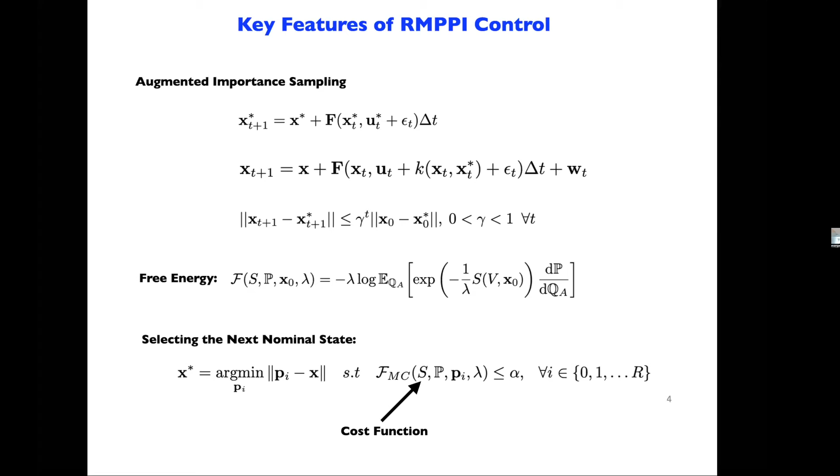And so one of the issues with robust MPPI is that you have to have a cost function, which is okay. You can do the minimization and you can pick the next best nominal state for the nominal part of RMPPI. But there are some blockers here when it comes down to whether or not this cost function is a non-stationary cost function, right?

And so the nice thing with RMPPI is that you can characterize its performance, and you can bring the different components inside that inequality, which tells you that your look-ahead performance prediction, the free energy of how well you're going to do, depends on the capabilities of the low-level feedback controller, a constraint violation term, and a Monte Carlo error.

And so a lot of what we are looking at right now is how we can get more useful bounds than the one that we have derived so far, for example, how we can incorporate in these types of bounds the cases where you have generalization bounds for model learning, and you want to be able to incorporate the generalization bounds into this type of inequalities that you get inside the RMPPI architecture. Some other things that we are looking at right now is multimodality.

And so, of course, we have applied that. We have done testing on real hardware, and this is our testing facility that we have at Georgia Tech, and that's the AutoRally vehicle. That's in the case where things are fully observable. We don't really provide to the vehicle any desired trajectory. We just let the vehicle have a desired speed, go as fast as you can, and you do not hit

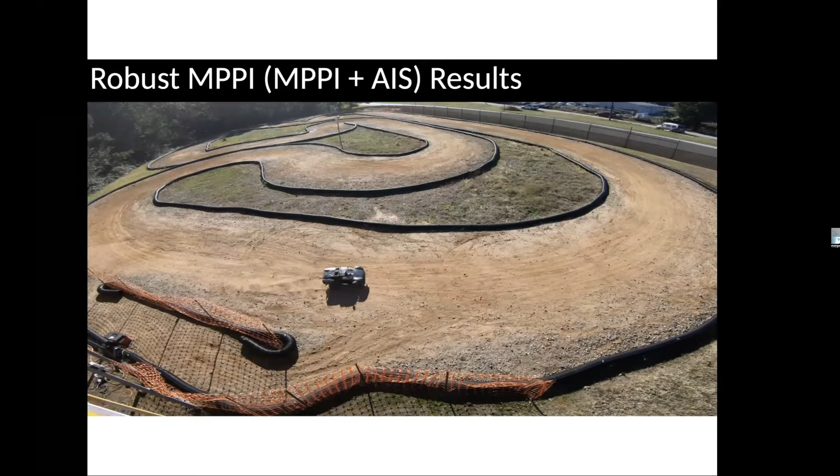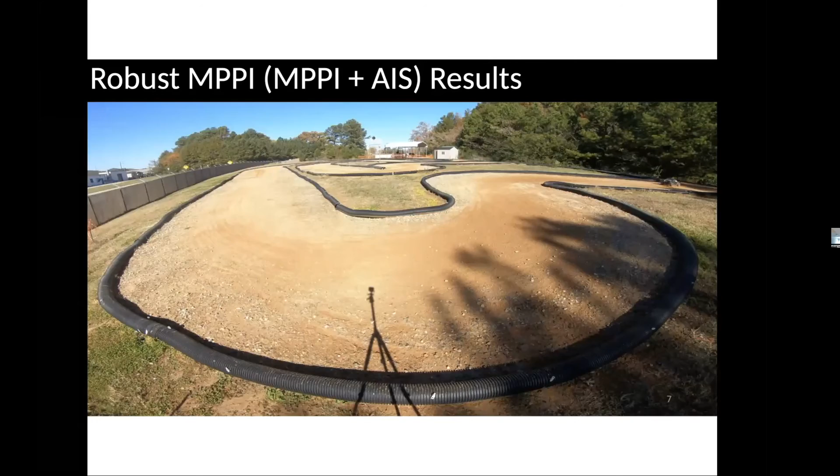boundaries. So this is kind of a video. I think you might have seen that before. Yeah, and so at this point our autonomy stack has matured enough. We can go out and do almost infinite laps, which is nice. It's nice to be able to repeat robotic experiments. So we get a very consistent performance.

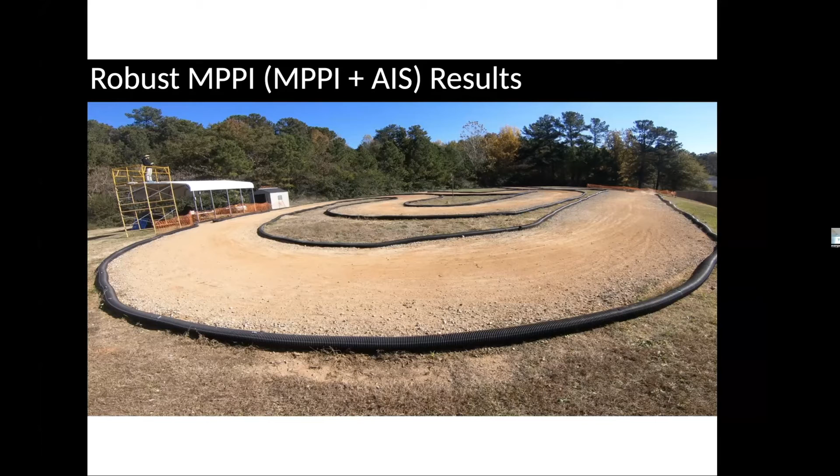Now, of course, on the more theoretical side, there are other ways to do stochastic optimization for model predictive control. We have been looking into generalized versions of stochastic optimization. MPPI can be derived from different perspectives, and people have shown that you can derive MPPI from stochastic optimization from an information theoretic perspective. So we have been looking into other forms of information theoretic measures, such as, for example, the Tsallis divergence, which is a generalization of the KL divergence.

And so then what you can see basically is that you can derive all of these different types of update rules, and one of them is also MPPI, and you can generalize them. And so that's a paper that we published last year in RSS, and we did a study in simulation where we saw that this new approach to sampling-based model predictive control works better than

MPPI and the cross-entropy method. And we have tried that with different policy parameterizations, also with unimodal, multimodal, and we also use the Stein variational inference approach. And in all of these cases, we saw in simulation that this generalization is fruitful.

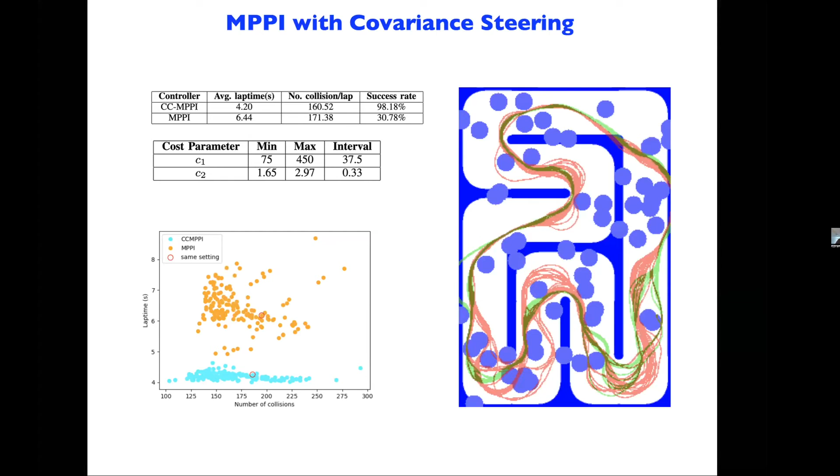Some other approaches here: for example, you can use these covariance steering algorithms for Tube-MPPI, so you can have a high-level MPC controller the way you want. You can pick any optimizer, and then the low-level MPC controller can be a controller that does a steering of a covariance towards your nominal trajectory.

In the case of MPPI, we don't have only one trajectory, we have an entire distribution. So you can essentially use, in the low-level MPC controller, a covariance steering controller to steer the distribution towards the one provided by MPPI. That's a paper that is accepted to ACC, and it will appear this year.

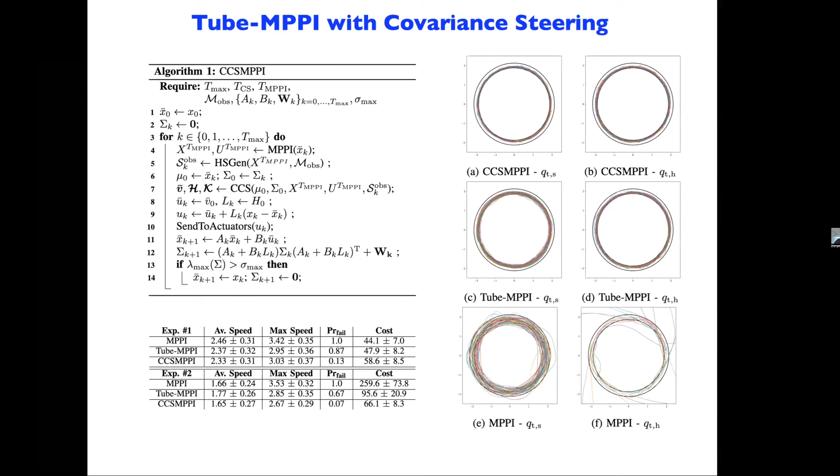Of course, we worked a lot on model learning and model adaptation, and especially in off-road scenarios, it's almost necessary to be able to adapt your model. This is something that I also say to my students sometimes: if you want to understand the underlying dynamics, you have to adapt, and adaptation is something that integrates information from the past to the future. Optimality comes in the sense of being predictive, right?

So it's interesting when you try to put adaptive control or model learning together with model predictive control. The combination is not, I would say, very natural, because these tools are looking in different directions. Model predictive controllers look into the future, adaptive controllers look in the past and try to integrate information. And what may happen sometimes is that the low-level fast adaptive control scheme tries to catch up with a model predictive controller that publishes trajectories very fast.

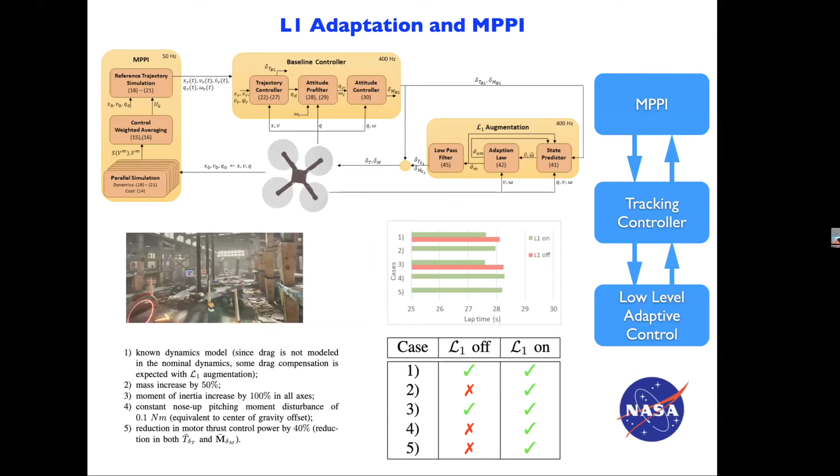And so we did some work in the past with L1 adaptive control and MPPI, and we published a paper here. And then we also tried to incorporate other model learning techniques, such as LWPR with a neural network. We expanded the ideas on pseudo rehearsal learning, and we were able to apply that to our vehicle.

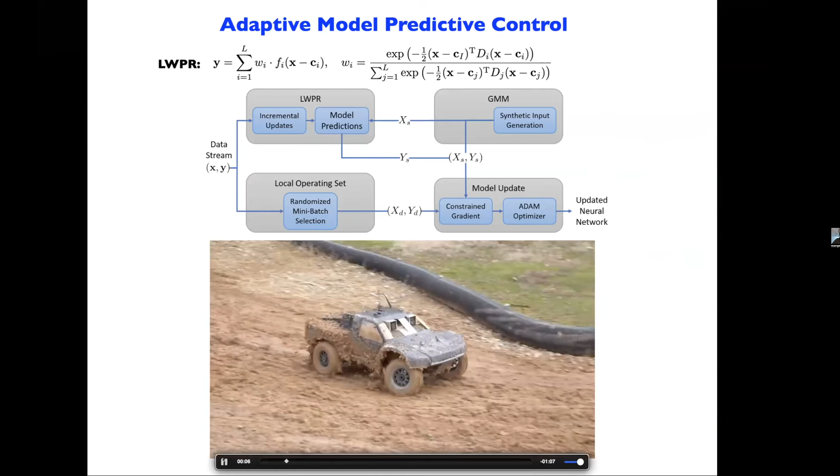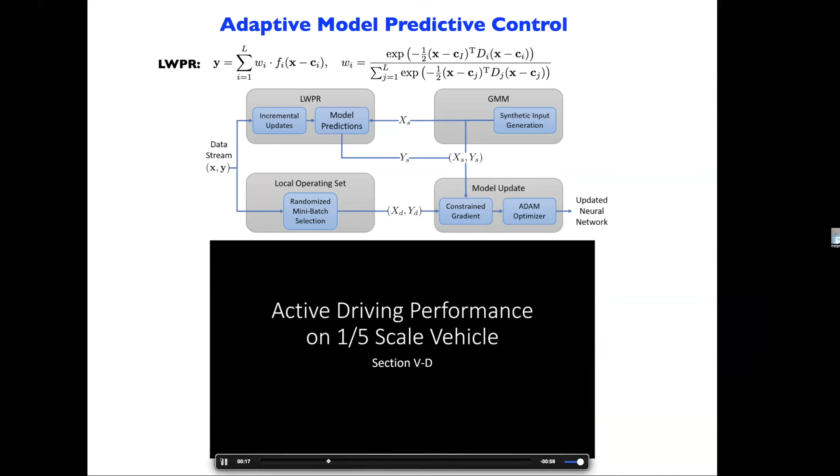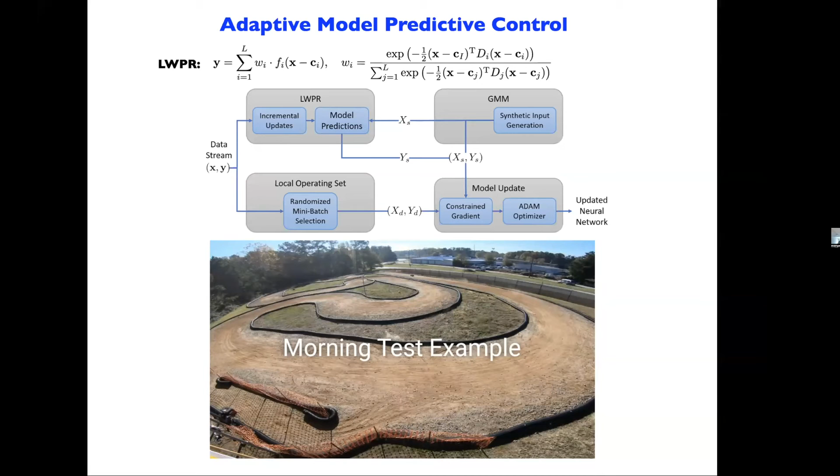And so I would say that all of these methods work, but they work because you have to do a lot of tuning, a lot of fitting. But there is always the fact that these modules are tuned in a separate way. And so I think the way to go in terms of model learning is to bring together model predictive control with model adaptation, and try to have one optimization problem that does both.

And so we just published a paper in RSS, and we have derived a formulation of differential dynamic programming that does that. It allows you to optimize not only for your control policy, but also for unknown parameters in your model. In this particular case, you have the standard equations of differential dynamic programming; it's just that now you have a value function parameterization and a state action value function that depend on the parameters. So in terms of applications of these trajectory optimization methods, you can apply these algorithms to adaptive model predictive control, right?

And again, in this particular case, you have a value function that is parameterized by the unknown parameters of your model. You can also use these methods for optimizing between different modes of the dynamics. You may have dynamics that change. In hybrid control, for example, you can use the same formulation to optimize over switching modes in your dynamics. And of course, you can use these methods for inverse optimal control. In this case, the parameters will appear in the cost function.

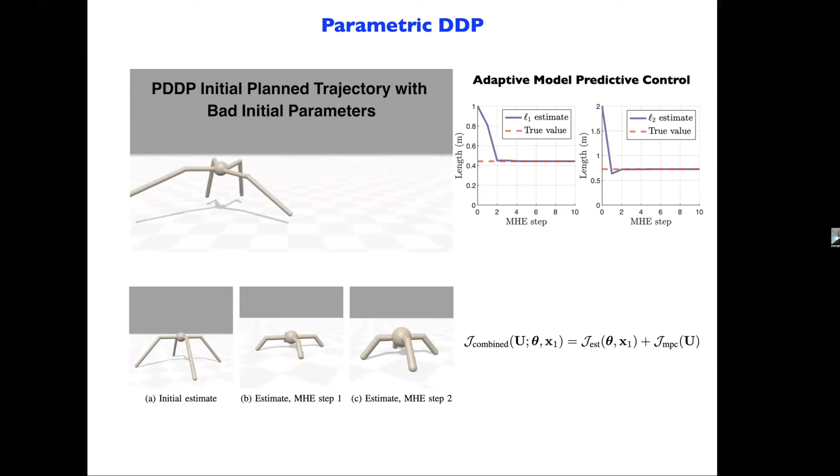In the paper, we have also proved the convergence of these approaches, and we have analysis with lemmas and theorems in terms of the conditions of convergence. I'm not going to show you anything right now on autonomous racing, but we are working on deploying these methods to autonomous vehicles. This is just an example that shows that, in an MPC formulation, you can optimize for the control variable as well as for learning parameters in your model.

In this particular case, the parameter was the length of the link, and the idea is that you have a combined cost function. You have a horizon right now from T to T MPC. It is a look-ahead horizon. And then you also have a horizon that goes backwards, a time window, which you're using for learning the dynamics, and the whole optimization is happening within one block of differential dynamic programming. And so, yeah, you can learn the parameters pretty fast.

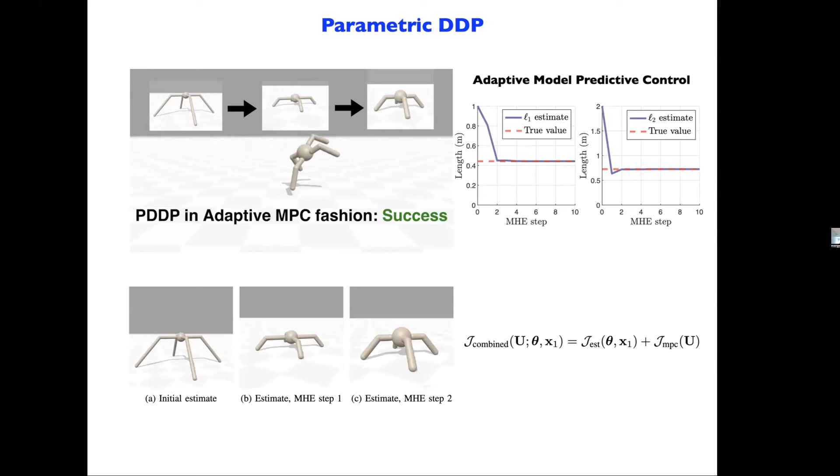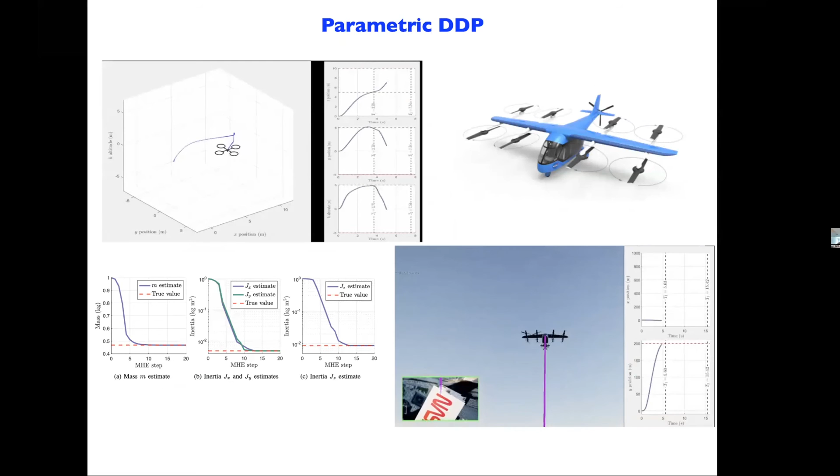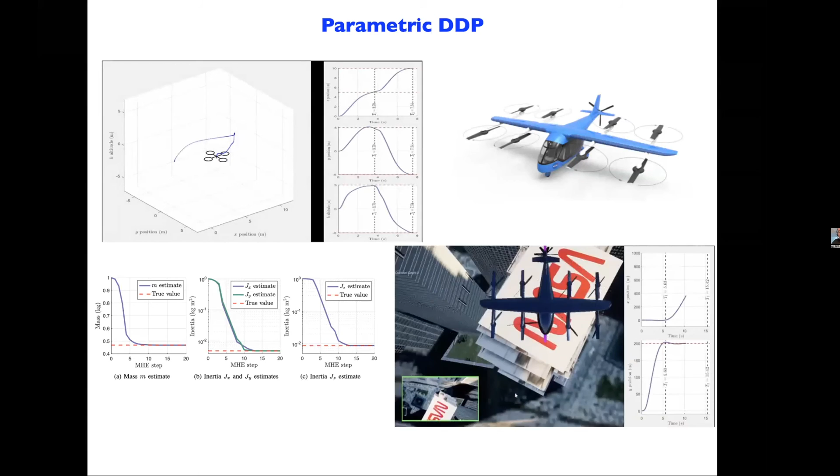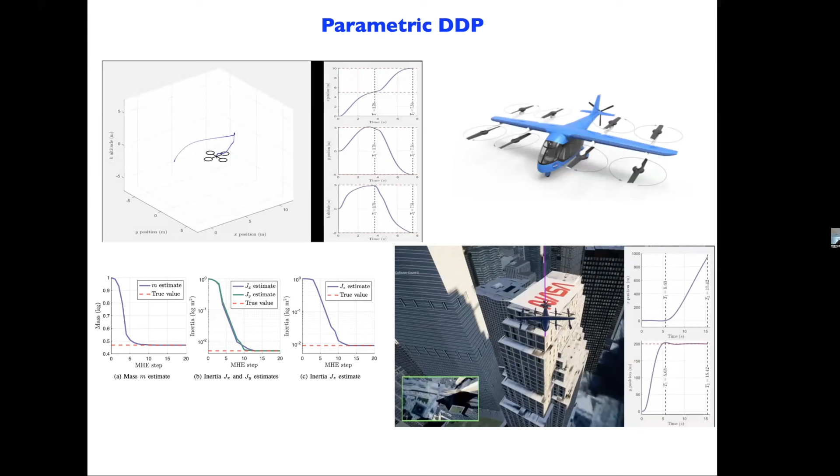Also, we have used that for a project that we have with NASA Langley for optimizing between different switching modes in this air taxi application. And again, this is a co-optimization problem. So we are optimizing not only for the actual control parameters here, but also in terms of when the vehicle is going to switch between the different modes. So I think that these are algorithms that we will, of course, have in the AutoRally pretty soon, and I'm looking forward to seeing the performance, especially in the context of model learning, of optimizing for learning and control.

And so just some of the conclusions here. Augmented importance sampling and augmented representations, I think, give you some level of robustness. There's work to be done in cases where your perceptual system changes, in cases where there is non-stationarity in the environment, and that has to do with how you pick your next nominal state in these augmented representations. I think we have a good start with these covariance steering methods, and I think that we are going to bring them close to real time. That's one of our future research directions.

Co-adaptation, meaning co-optimization for model learning and model predictive control. We are right now in the process of having hardware experiments, and also an interesting thing here is that you can use these methods for optimizing linear as well as nonlinear feedback policies, which is actually great. Another piece of work that I was not able to talk about is this idea of maximum entropy differential dynamic programming. There's a paper right now in ICRA, and so we are thinking of incorporating these maximum entropy differential dynamic programming approaches inside RMPPI to avoid local minima when we do the optimization.

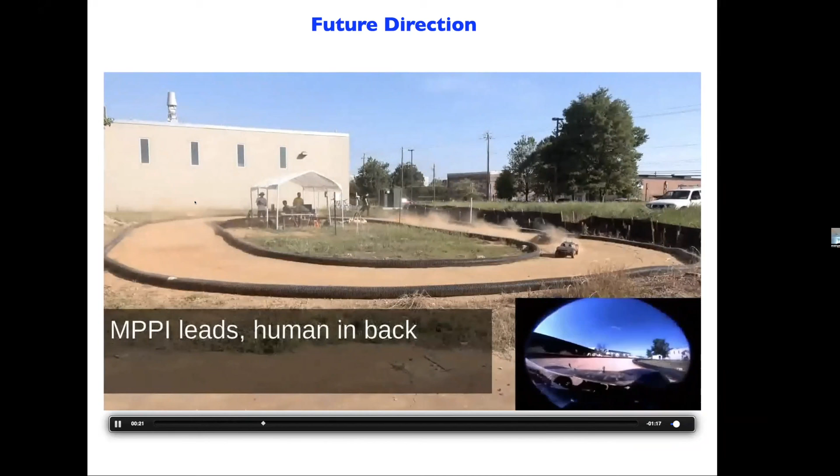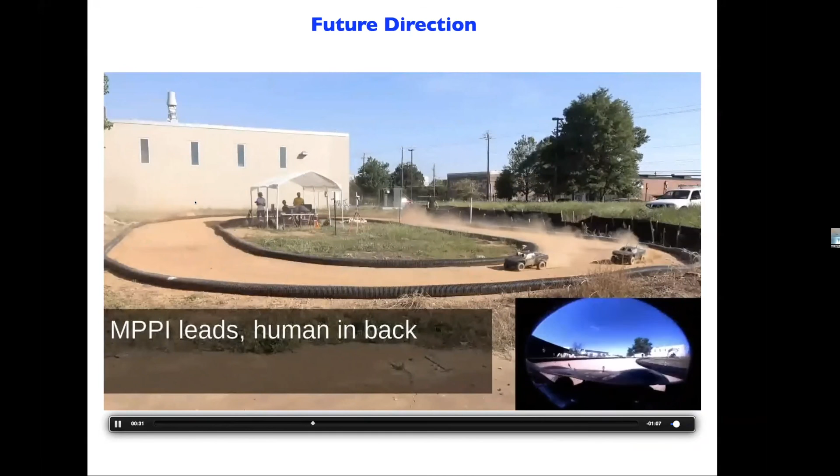And so there's a guy here who is controlling the first vehicle, and there's MPPI that tries to pass the vehicle and is passing the vehicle. That was an experiment that we did, I think, back in 2015-16. And I think that one of our goals is to go to our bigger facility and repeat these experiments as well.

So there are certain areas in the brain that are responsible for spatial navigation, and it turns out that people like taxi drivers or pilots tend to have these areas bigger. So there are things to learn there, and I think that we can also contribute to this type of research.